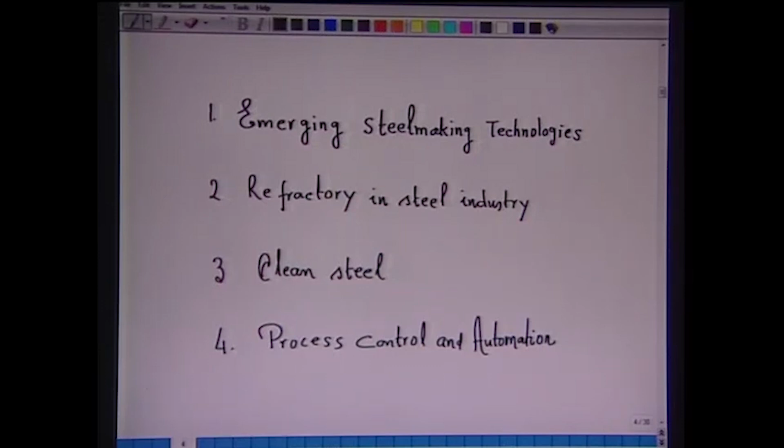Because of the stringent requirement for the industry, in the next few lectures we will be studying the following four aspects: first, emerging steel making technologies; second, refractory in steel industry; third, clean steel; and fourth, process control and automation. So, I will be starting first with emerging trends in steel making.

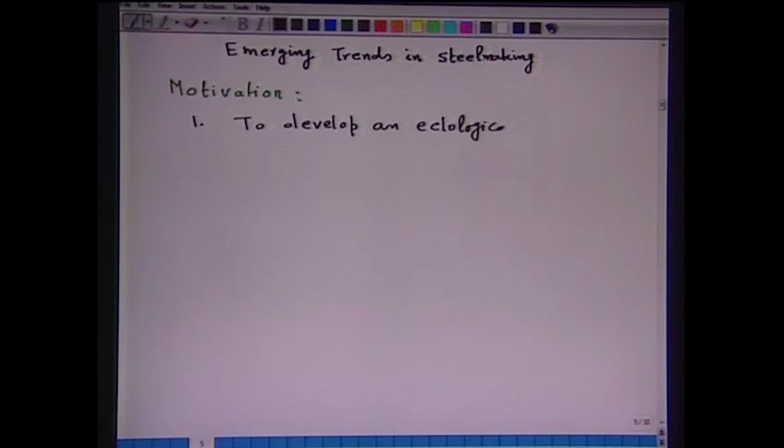What is the motivation of these emerging trends? The first motivation is to develop an ecological balanced technology. What does it mean? An ecological balanced technology means when the reactants enter into a system at 25 degrees Celsius, then the products should be used within the system such that the exit of the product is also at 25 degrees Celsius to the extent it is possible. That means recycling, reuse and recirculation within the system is an important part of ecological balance technology.

So, in the future to come, this particular issue will be important. Current practices, no doubt, are using recycling or recirculating or reusing to some extent, but even then the emissions, the hot gases, are still discharged into the surrounding at a very high temperature. So, the basis would be to develop an ecological balance technology to the extent possible.

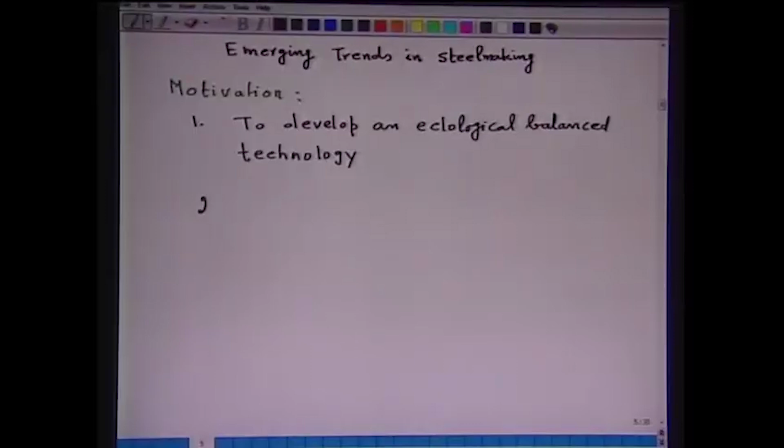Second motivation is in terms of flexibility, to use varying proportion of feed materials. You must be recalling that BOF steel making cannot use scrap more than 30%. You have limitations over there. Electric arc furnace cannot use more than 30% hot metal.

So, both the modern steel making processes that we have discussed have limitations. So what would be required? Depending on the availability and supply of raw material, a process should be there which can make use of any proportion of the charged material. For example, if hot metal is available abundantly, then the process should be able to use hot metal and convert it to steel. If scrap is available abundantly and hot metal is in shortage, then scrap should be usable, or varying amounts of DRI, that is directly reduced iron, or iron carbide, should all be possible to use. So, what I want to say is that a process would be very much desired where the flexibility in terms of varying proportion of charge could be possible, depending of course on the availability.

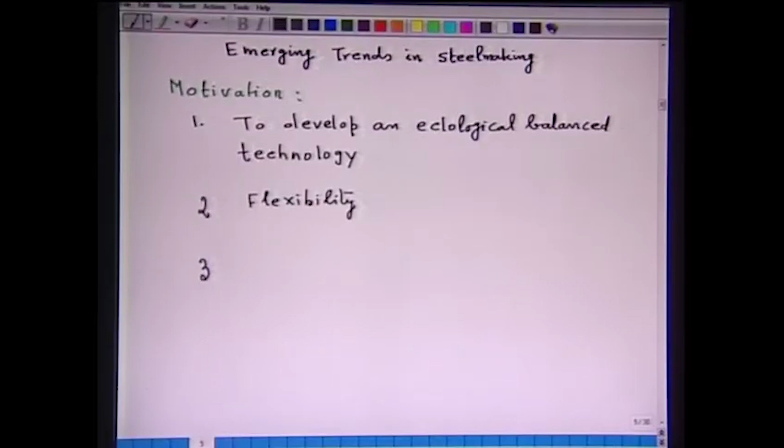Third motivation could be, you know that around 40% under Indian condition, steel is being produced by electric arc furnace, and electric arc furnace is highly electrical energy dependent. The consumption of electricity, no doubt with modern gadgets, has come down to a very low value, but still the electrical consumption is high. That means electrical energy is the principal source of heat in electric arc furnace. Now, recalling that electrical energy is being produced in thermal power plants by combustion of fossil fuel, hence the emissions that are generated in the power plants will also contribute to the emissions by electric arc furnace, in a way that whatever electrical energy we are using in electric arc furnace is in fact being derived from combustion of fossil fuel.

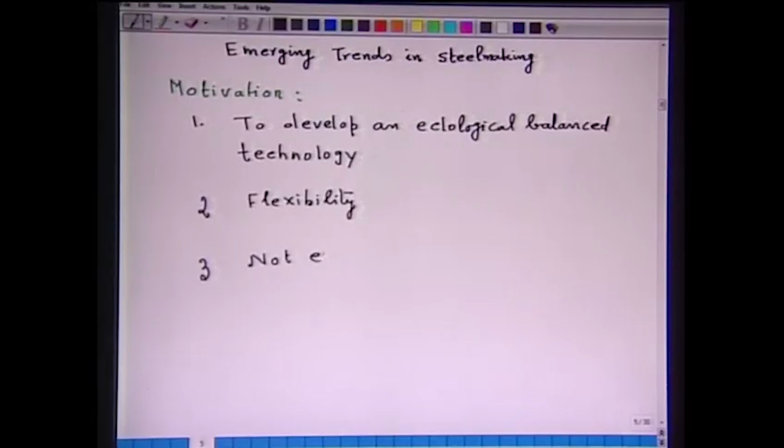So a third motivation could be a process which is not electrical energy dependent.

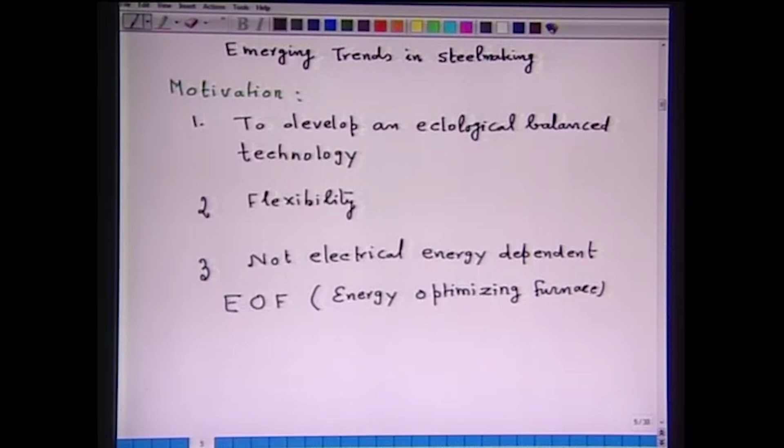Having seen these motivations, now one of the processes that has been developed in the last few years is the so-called EOF, that is, Energy Optimizing Furnace. As the name suggests, this is a furnace which is used to produce steel by optimizing the energy which is produced due to the chemical reaction when hot metal is converted to steel. That means, in short, an energy optimizing furnace is a furnace-cum-refining unit which has a provision to inject oxygen or carbon below the melt, or oxygen above the melt, in order to carry out post combustion of the evolved gases. So this is the concept of an energy optimizing furnace.

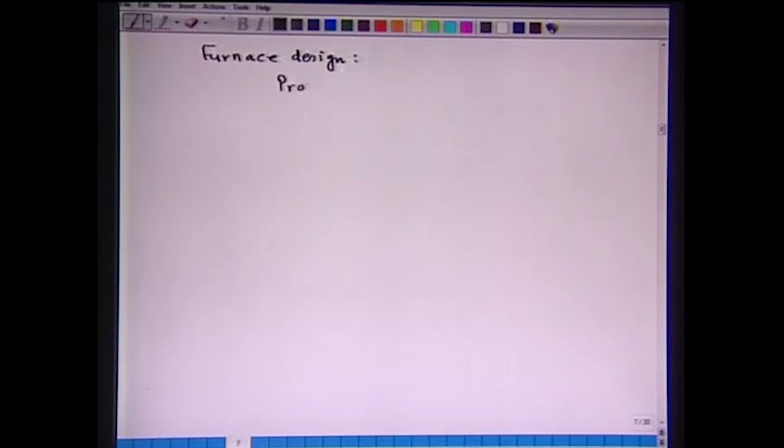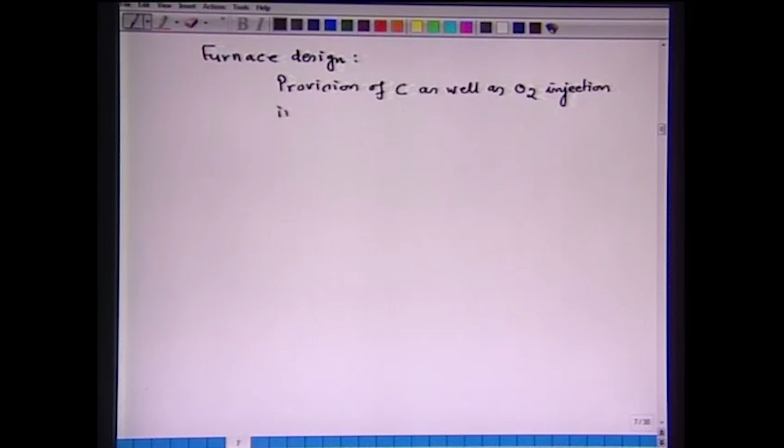So, in the furnace design, what are the important issues? The furnace should have provision for carbon injection as well as oxygen injection in the melt. You require oxygen injection for refining.

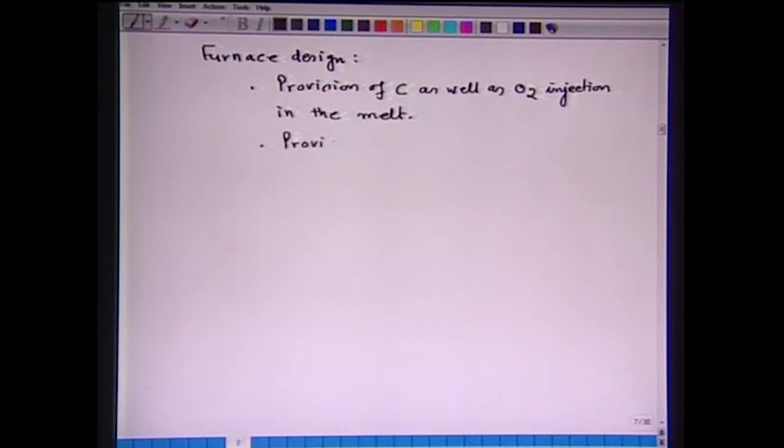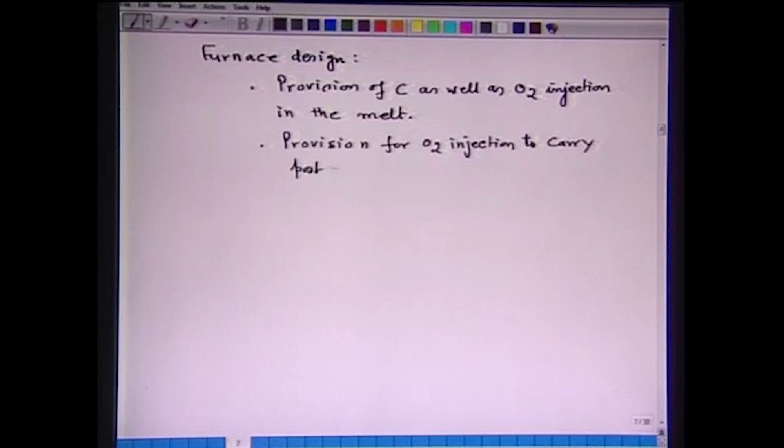Second, provision should also be there for oxygen injection to carry out post combustion. So, these two are the important design aspects, among several design aspects that could be there. From the refining point of view, these two are the important issues.

So, a proper dimension of the furnace has to be selected—say, diameter or height of the reactor—so that these functions could be accommodated.

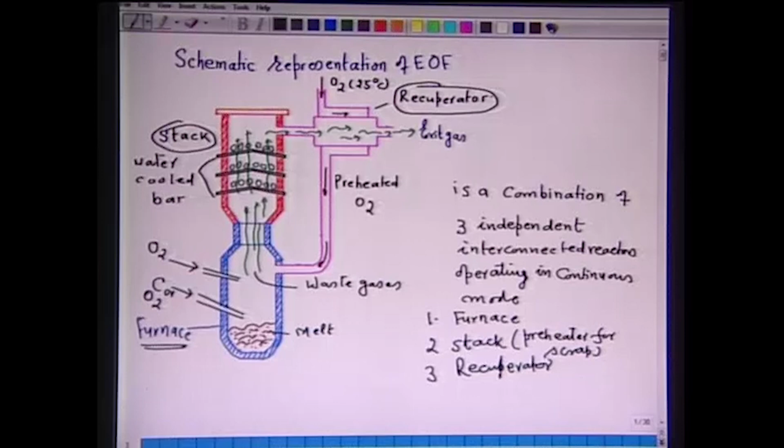Now, if we see the second reactor, which is the stack, this is on top of the furnace. It is connected and joined such that no waste gases leak. This is an important engineering aspect of this EOF furnace.

Now, this stack has to be designed such that the scrap is preheated by the waste gases discharged from the furnace. So, in the diagram you see that the waste gases are flowing upward, heating the scrap in the stack, and the used gas is passing into the recuperator.

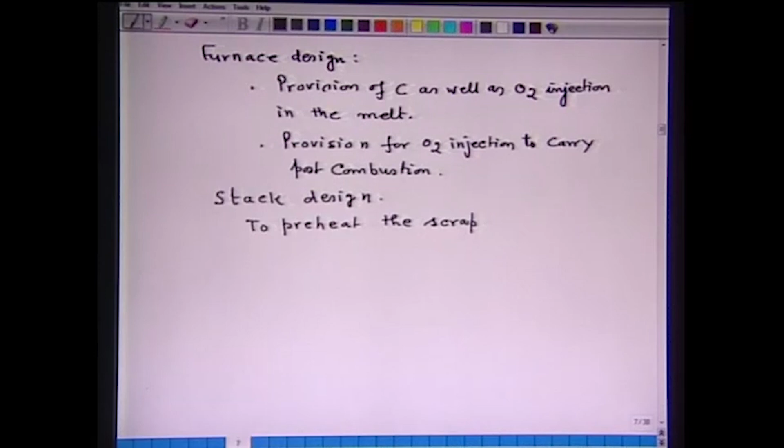So, as regards the stack is concerned, what are the important things? For the stack design, it is important that it is used to preheat the scrap by the waste gases flowing upward from the furnace.

Now, since preheating of the scrap is done by the flowing gas, therefore in the design of the stack it is important to consider the residence time. Residence time of the flowing gases is important.

Because scrap will be heated through the heat transfer between the flowing gas and the stagnant scrap, which are kept on the water cooled bars, as you have seen in the figure.

Now, since the gases are flowing at a particular speed, in order to preheat the scrap to a maximum temperature, it is important that the residence time of the gas should be maximized.

So, in this connection, for example, residence time is equal to diameter of the stack upon flow velocity of the gas. If the flow velocity of gas is low, the residence time will be high. If the flow velocity is high, residence time will be low, for a particular diameter of the stack or preheater.

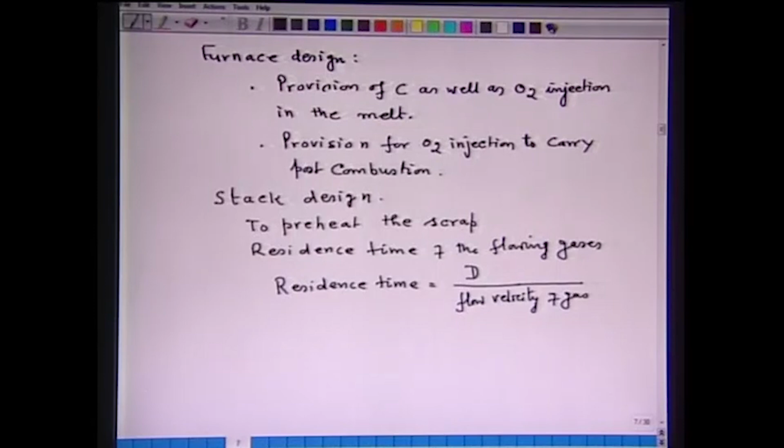Around 800 degrees Celsius, the gases pass into the recuperator. This is an important part of the stack design, among others, because you have to have a tight sealing between the furnace and the stack, otherwise leakage will be there. So, these are all the engineering construction of the entire assembly.

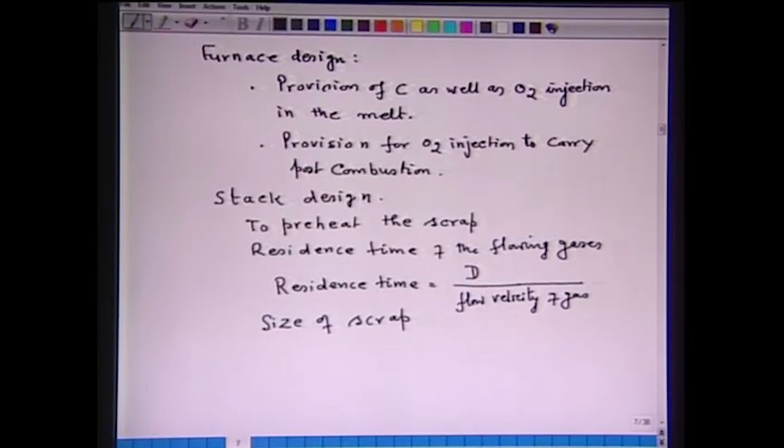Another important thing that has to be optimized is the size of scrap. Too large a size or too small a size, both will not be good. Too small, it is difficult to accommodate in the stack. Too large, they will not be heated up to the temperature. So that also is to be decided.

The third important part of the EOF is the recuperator, as shown in this particular figure. So you notice in this figure, this whole aspect is the recuperator. In the recuperator, what is happening?

The exit gas from the stack is entering into the recuperator at around 800 degrees Celsius, and the exit gas is discharging at a temperature around 350 degrees Celsius, which can vary. That depends on the length of the preheater, the length of the recuperator, for a particular cross sectional area of the recuperator.

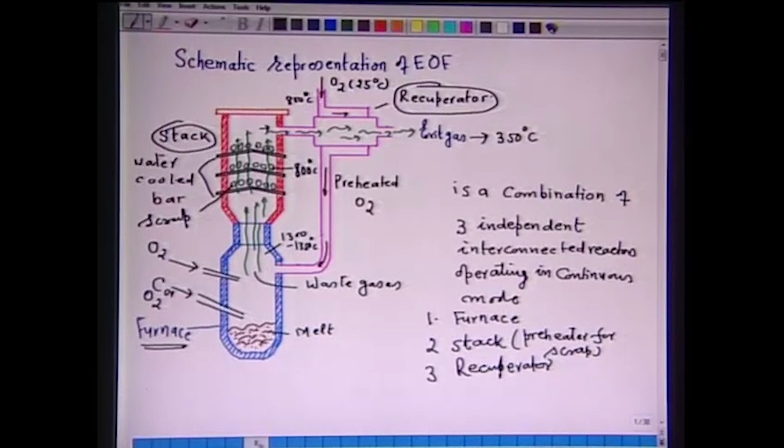So in the recuperator, oxygen is entering from the top and preheated oxygen is entering into the furnace. The design of the recuperator is equally important, because the gases entering the recuperator at 800 degrees Celsius—it is important that you extract as much heat as possible, so that the discharge temperature of the exit gas is very low.

So for the design of the recuperator, what is important? The length of recuperator for a given cross sectional area. For a given cross sectional area.

Again, the oxygen is heated through the walls of the recuperator. When the hot gases flow through the recuperator, the walls of the recuperator are heated, and as oxygen flows, through heat transfer from the wall to the flowing oxygen, the preheating of oxygen occurs.

Now remember, the oxygen is entering at 25 degrees Celsius. So at the most it could be heated up to 200 or 300 degrees Celsius, which of course depends on the length of the recuperator when a cross sectional area is being decided.

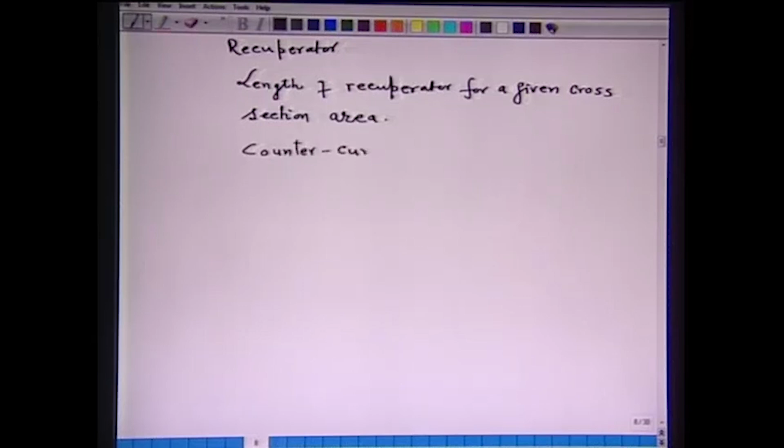So in the design of the recuperator, this recuperator works, for example, in the counter current mode. This counter current mode is the most efficient design of heat transfer between the flowing fluids.

So you see that there are several issues involved in the design of an EOF, energy optimizing furnace. These furnaces are working.

You also note from here that the reactants are entering at 25 degrees Celsius and the exit gas is discharging at around 300 to 350 degrees Celsius, that's number one. Number two, because of the post combustion in the furnace, you are utilizing the chemical energy of carbon monoxide, also the sensible heat of the exit gases, for preheating of the scrap. So it is leading, to some extent, to an ecologically balanced technology.

Now, as regards the operation: conventional operation is for 100% scrap. Carbon is injected to take care of the heat balance. Waste gases, produced through the refining of carbon to CO, enter into the stack at 1300 degrees Celsius, preheating the scrap.

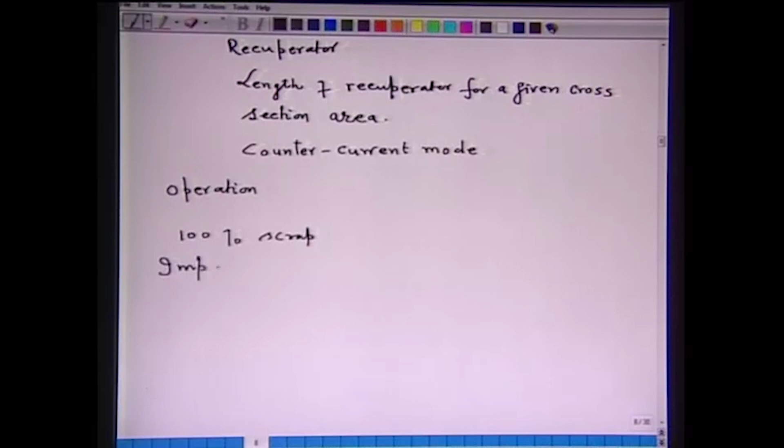Now some of the important features. This is a sort of combined blowing technique in which oxygen is submerged to the bath as well as applied from the top. Second important feature: it utilizes the sensible heat of off gases. Third, this method is flexible in terms of use of hot metal and scrap.

Liquid steel with low level of phosphorus and sulfur is possible to produce, with low noise level, and an average of 42 heats per day is possible. Another important feature is that you are using 100% scrap with no electrical energy. That is also an important part of this.

Steel quality aspects: due to continuous slag flushing, if you adopt that practice, a sulfur content of very low value is possible. Similarly, phosphorus content of very low value is also possible. That means steel quality is in general very good.

Now the basic characteristics, what are the available sizes of EOF furnace. These furnaces are available in capacities of 30 to 40 tons, 60 to 80 tons, or 100 to 120 tons.

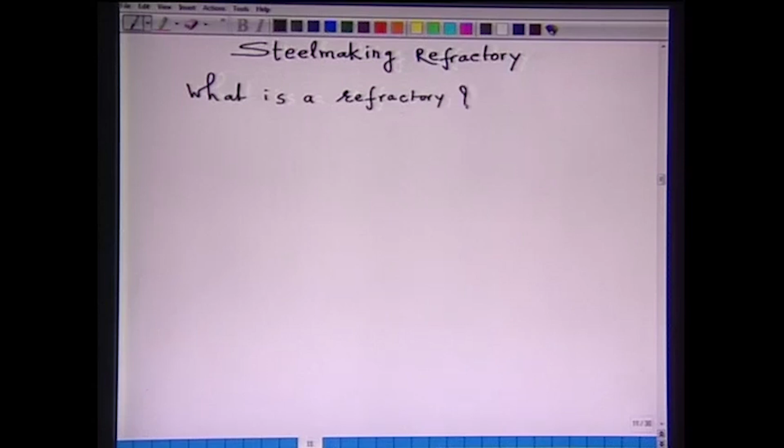What is a refractory? Refractory is a material which can sustain high temperature without fusing. For example, fire clay, alumina, magnesite, chrome magnesite and dolomite.

Refractory materials are produced to meet specific demands of the steel industry. Mind you, refractory materials are produced from naturally occurring raw materials. They do not occur as such in nature, but the raw materials occur in nature, and from that, refractory material of the required and desired quality is produced so that it can match the requirement during conversion of hot metal to steel.

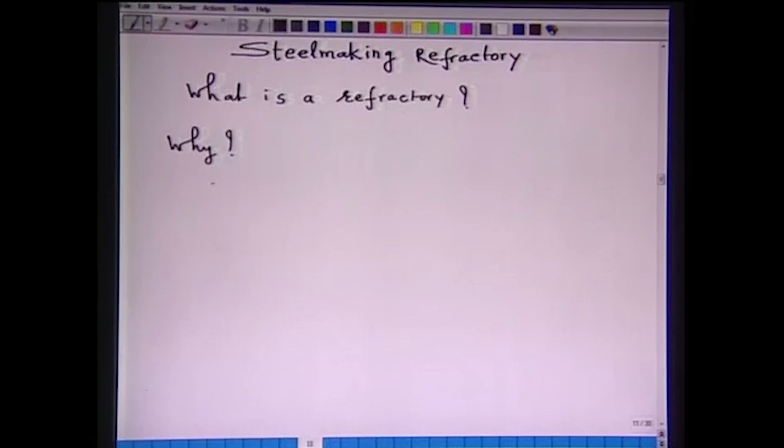Mind you, there are very diversified requirements in steelmaking technology. These requirements are not only in steelmaking technologies, but also cement industry, glass making industry, ceramic industry—all require refractories. But the steel industry is the major consumer of refractory. I can say very boldly, if there were no steel industry, refractory probably would not be required at that high quality. Why do you require a refractory? For two reasons: first, to minimize heat losses.

To minimize heat losses, you cannot use a steel shell. If you use the steel shell, all the heat which is produced inside the reactor formed by the steel shell will be lost. The reactants and product may react, so it is not possible to use a steel shell. Therefore, to minimize the heat losses, refractory is required. For this, thermal conductivity of the material is important.

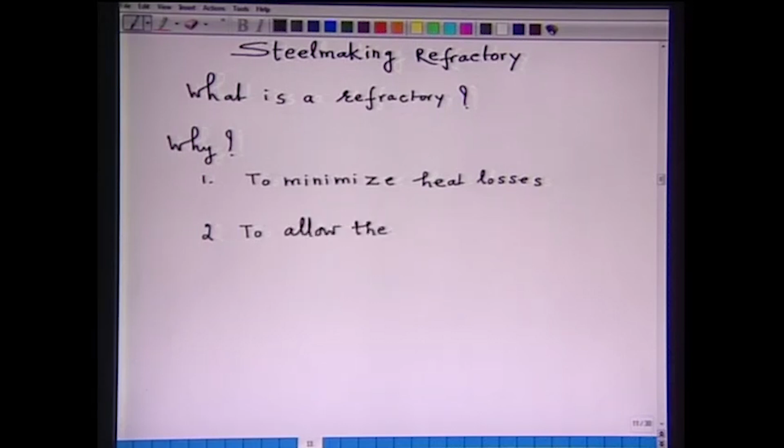Another important reason you want to use refractory is to allow thermal energy dependent conversion of reactants into products. Now, again metallic vessels are not suitable, because in steel making we handle phases

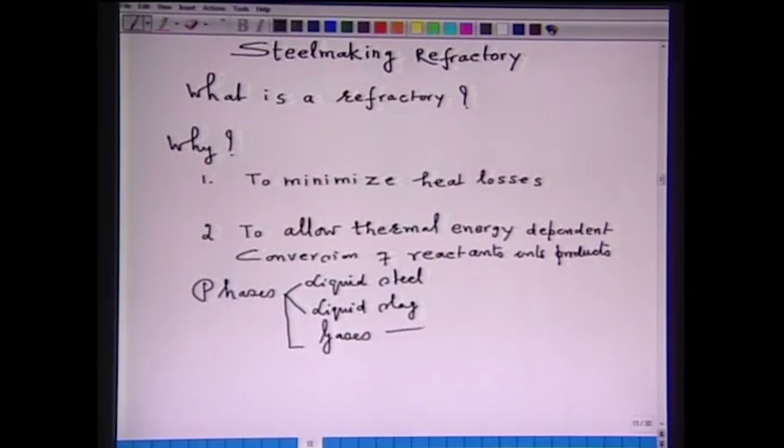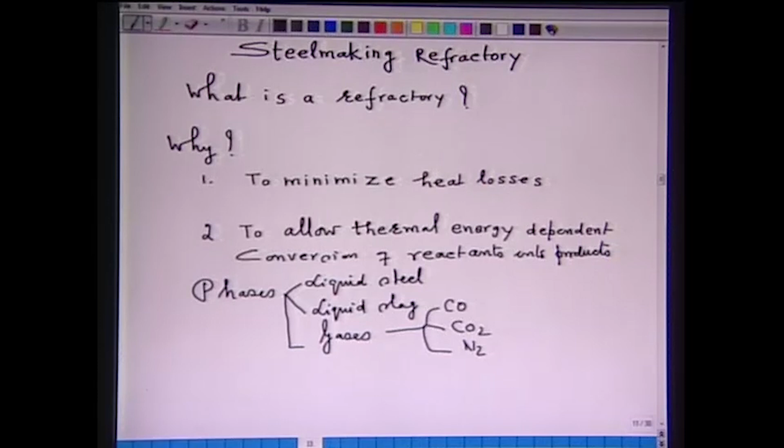like liquid steel, which contains iron, carbon, silicon, phosphorus and so on. A metallic shell will not be suitable. We also handle phases like liquid slag, which is an oxidic mixture of inorganic compounds. We also handle gases - could be carbon monoxide, carbon dioxide and nitrogen. These phases are in contact and constantly in motion. The flow is highly turbulent. The gases are also moving with certain speeds. Among this, CO is reducing, CO2 is oxidizing and nitrogen is inert.

So, because of the handling of these phases, because of their presence for a long time - for the duration which is required for conversion of hot metal to steel - for that particular time you need a material which can sustain the temperature, chemical reactivity and so on of the hot metal, slag and gases.

Now, let us see what are the types of refractory materials available. Types of refractory material - as such, we have oxidic and special refractory material. Among the oxidic, we have three types of oxidic material.

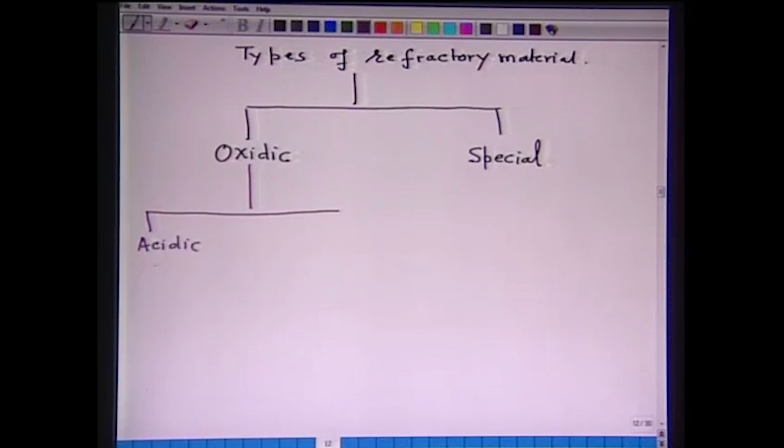One is acidic. In acidic, SiO2 is the main component. For example, fire clay, quartz, ganister, and these acidic refractory materials cannot be used in contact with a slag which is basic in nature. Remember, slag is also a mixture of these oxides, if you recall the lecture on slag making. If you use acid refractory in contact with the basic material, a reaction will take place. So, these are not useful under basic conditions. The acidic material can only be used under acidic conditions.

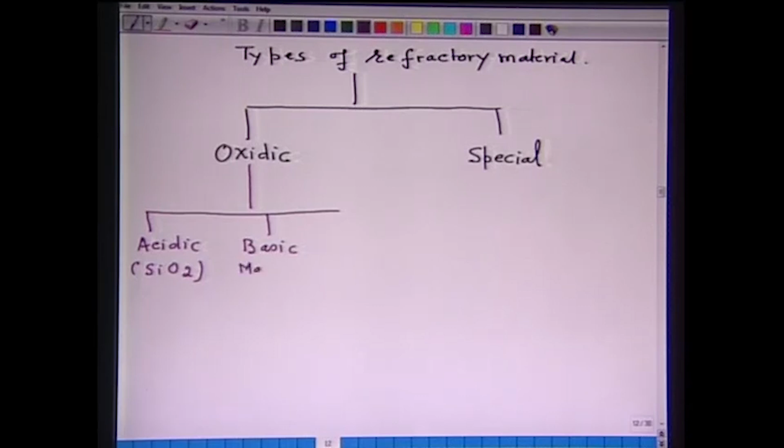Another type is basic refractory, for example, magnesite, your dolomite - you have MgO, C, and there are further types of basic refractories. Now, these basic refractories cannot be used in acidic environment. They can be used only under basic environment.

Third, neutral refractory. Neutral refractory, for example, chromite, carbon or mullite - they are neutral refractory. These refractories can be used either under acidic environment as well as under basic environment, depending on the requirement.

Then under the special category, one we have is silicon carbide refractory. Then we have cermets - mind you, they are special and high quality refractory. And third is the Silon, SiAlon, that is silicon, aluminum, oxygen and nitrogen.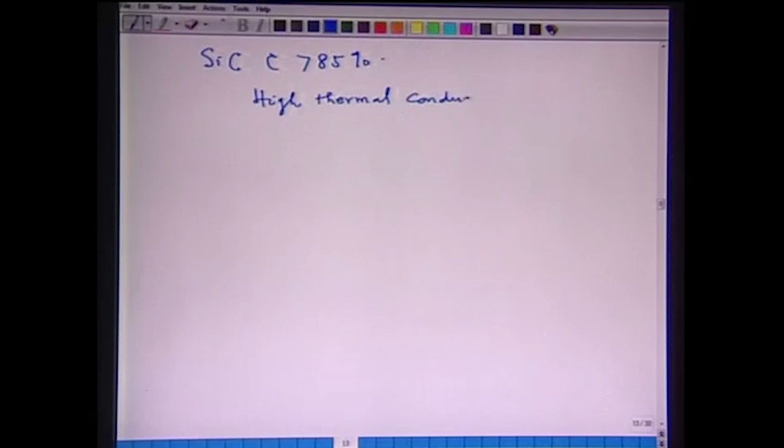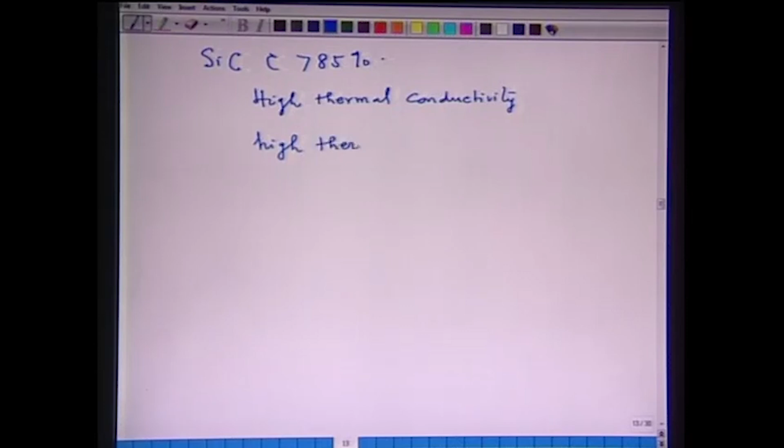Now, something about silicon carbide refractory. Silicon carbide refractory has carbon greater than 85%. Some of the properties: silicon carbide refractory has high thermal conductivity and high refractoriness. They decompose around 2200 degrees Celsius, but does not melt. It also has high thermal spalling resistance, excellent mechanical properties and is lightweight.

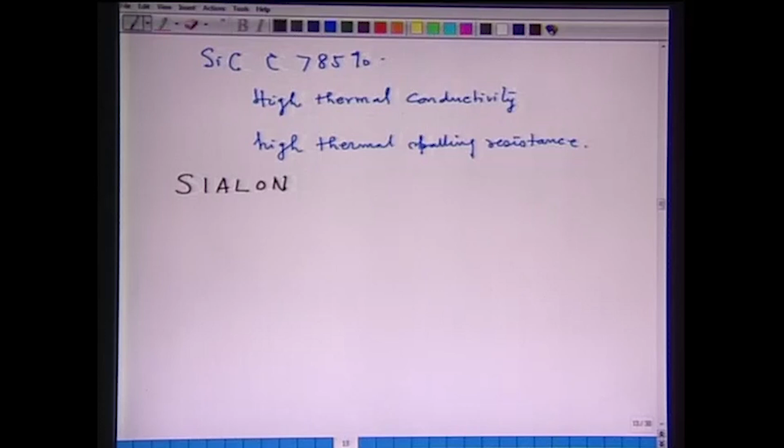Sialon refractory, SiAlon - these refractories are a solid solution of alumina in silicon nitride. Hot pressing of this mixture is done at 18 to 30 megapascal pressure and 1700 to 1760 degrees Celsius in graphite molds to get a low porosity dense product.

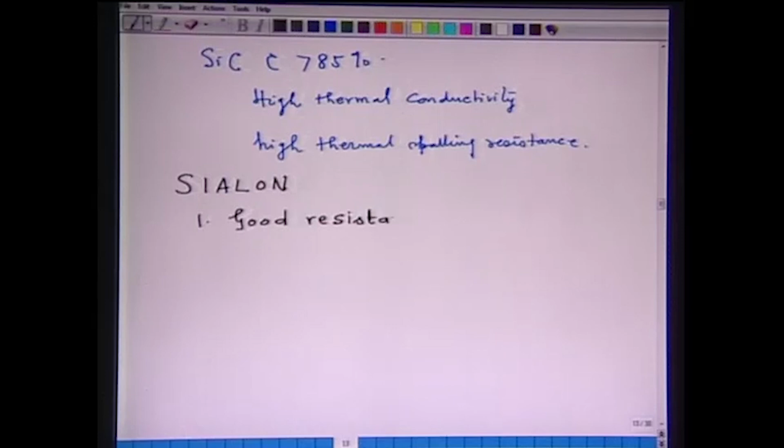Certain properties of Sialon refractories - mind you, Sialon refractories are excellent refractories for very critical applications. First advantage of Sialon refractory is good resistance to oxidation and action of molten metals like copper, aluminum, iron and steel. That is one of the very important properties that these Sialon refractories have. They are highly resistant against the action of these liquid metals.

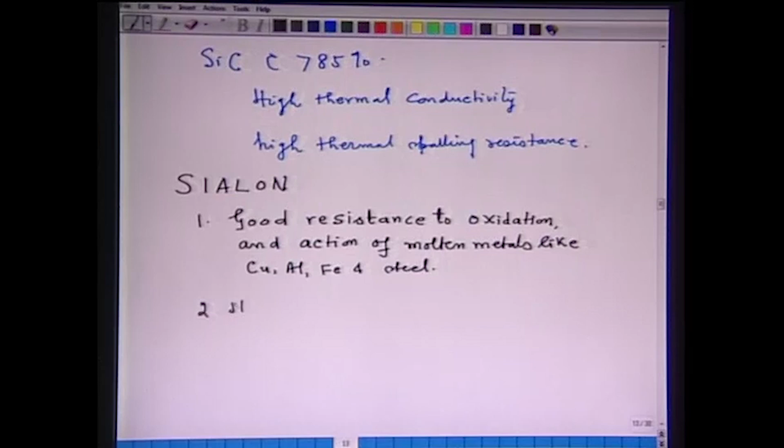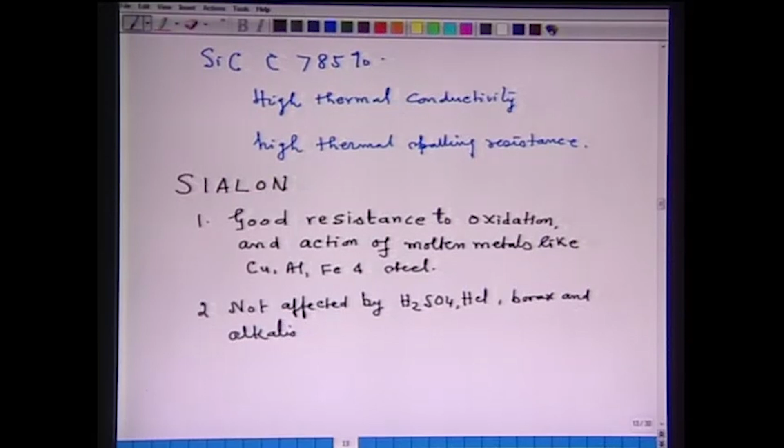Second important property that these Sialon refractories have is that the refractories are not affected by H2SO4 or HCl, borax and alkalis. But the only problem with this refractory is that they are very expensive to produce. In the next lecture, we will be seeing further details of the oxidic refractories, the manufacturing of these refractories and some important properties.